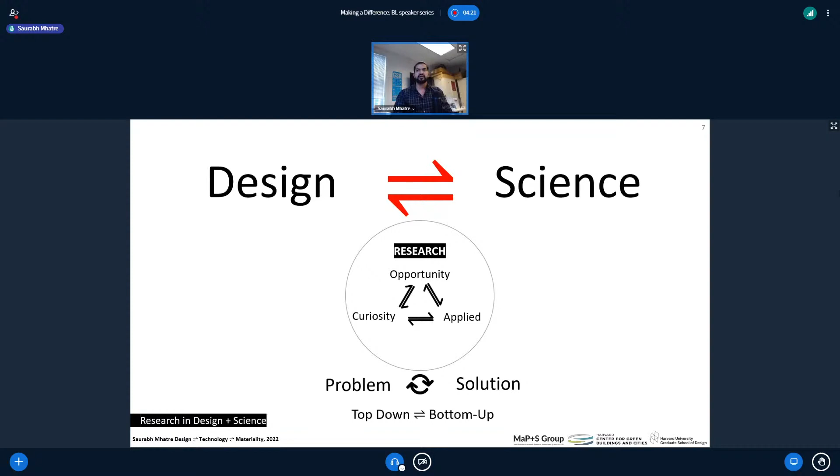You'll also see an interesting dialogue and dynamic shift between curiosity-based research and applied research, where we give ourselves the freedom to explore as well as, at some point, focus on solutions to a very well-defined problem.

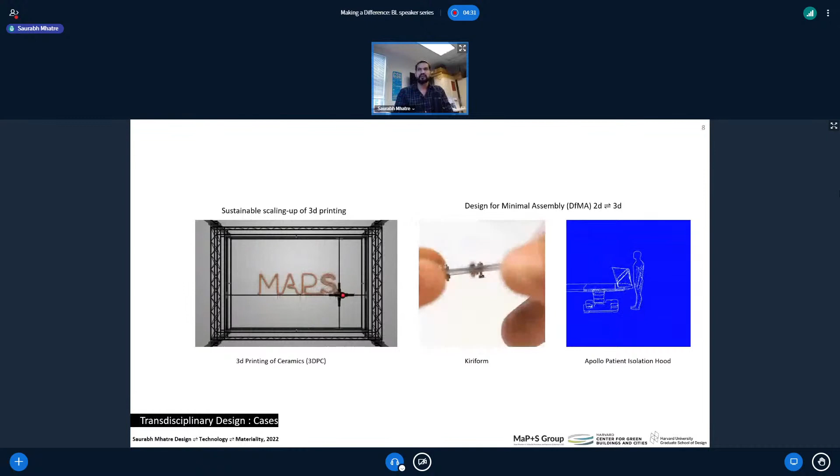I'm going to give you 3 examples of projects which fall within the blurred domains of design, science, technology, materiality, and in some way contribute to the larger agenda of sustainability.

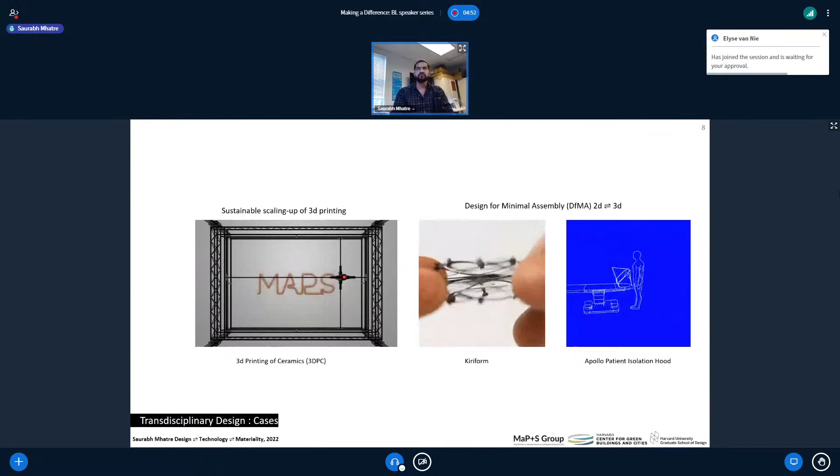First, I'm going to talk about our work on 3D printing of ceramic, a sustainable and opportunity-driven way of scaling up 3D printing in context to architecture. Then I'm going to show you 2 projects: one which starts off as pure curiosity-based research, a project which is a solution trying to find an application; and another one under applied research, which is a solution for a well-defined problem.

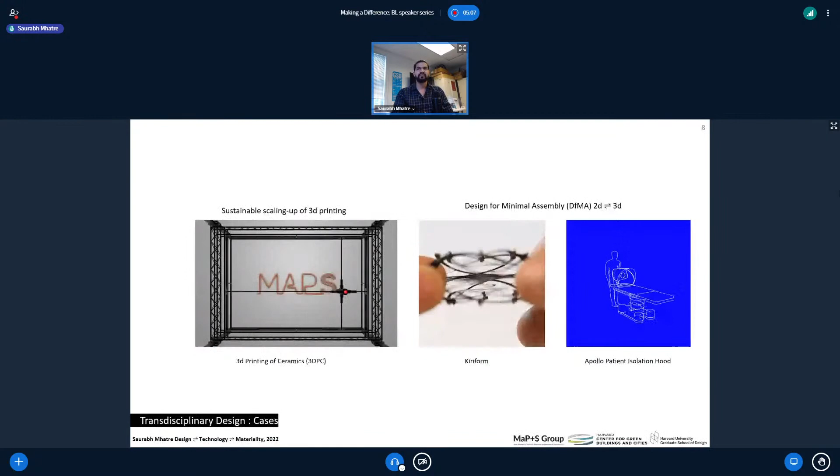Due to time constraints, I won't go too much in depth in these projects, but I'm open for questions after the presentation.

So, why ceramic 3D printing? 3D printing, also known as additive manufacturing, is a manufacturing process where the 3D printer creates three-dimensional objects by depositing material layer by layer in accordance to an object's model. Using these 3D printers, we can make very efficient, precise, dynamic, and beautiful creations with a variety of materials.

Majority of the 3D printers available in the market cater to the desktop scale, something that you can easily keep on your table, and use commonly available plastics as the printing material.

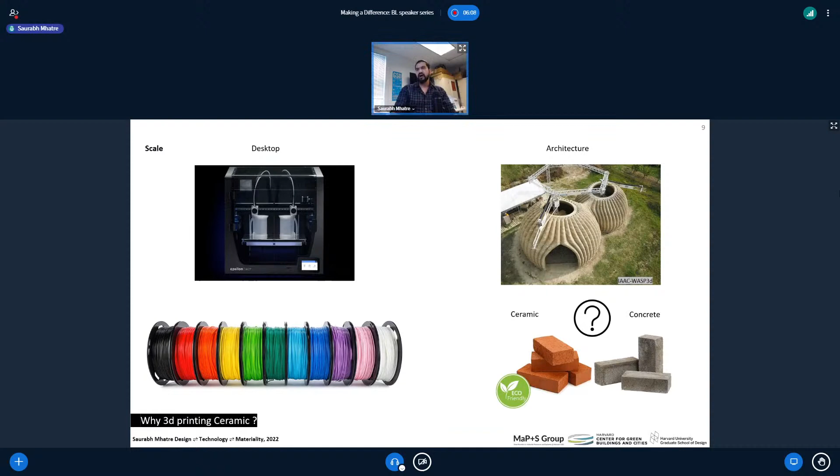When we think about 3D printing of larger objects like buildings, we can't imagine printing tons and tons of plastic. It's just not sustainable. Hence, materials like ceramic and concrete come to mind. Majority of large architecture scale 3D printers are 3D printing concrete, but we believe ceramic holds a lot of promise as a sustainable option, and when paired with robotic workflows, can drastically reduce the carbon footprint imposed by the construction industry.

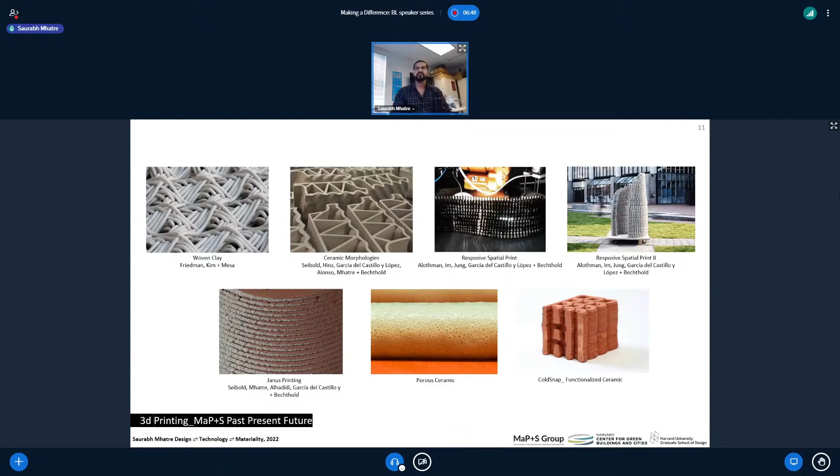I would categorize this as opportunity-based research. For the last few years, we, the MAPS group, have focused on studying conventional ceramic manufacturing and forming processes and researching how integration of emerging technologies can add novelty to the industry and help achieve larger goals like customization and sustainability. I'm going to focus on two projects: one which looks at 3D printing a single body of clay, and another where we co-extrude two different bodies of clay together.

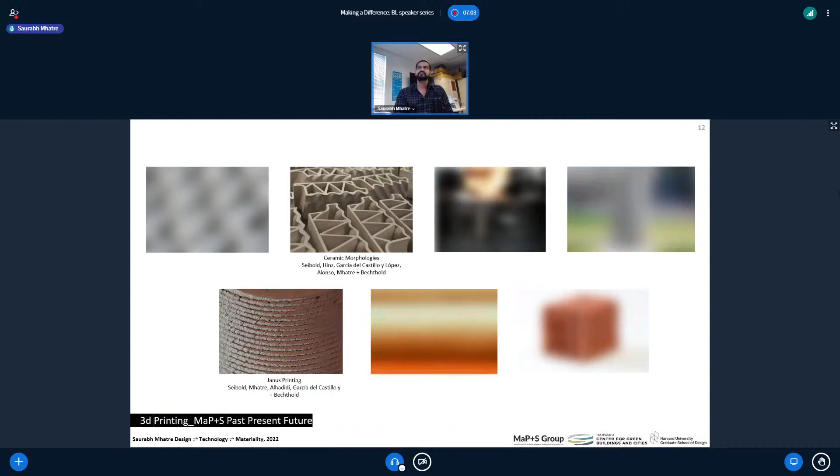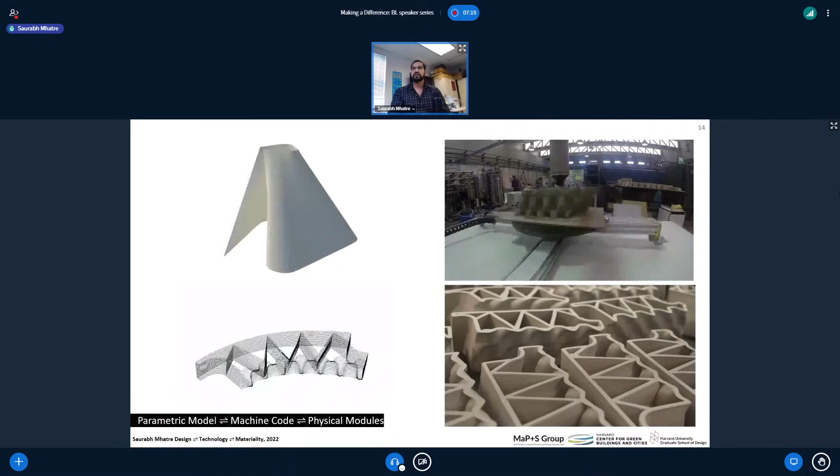The project Ceramic Morphologies utilizes a clay extrusion system and a three-axis armature to produce 552 unique ceramic elements for the pavilion to be exhibited in Spain.

Each element is sized according to its position within the structure, the dimensional constraints of the printing bed, and a maximum allowable toolpath length. We developed a novel computational approach to generate a surface geometry of the pavilion, discretize the form into individual bricks, and accommodate for the frame.

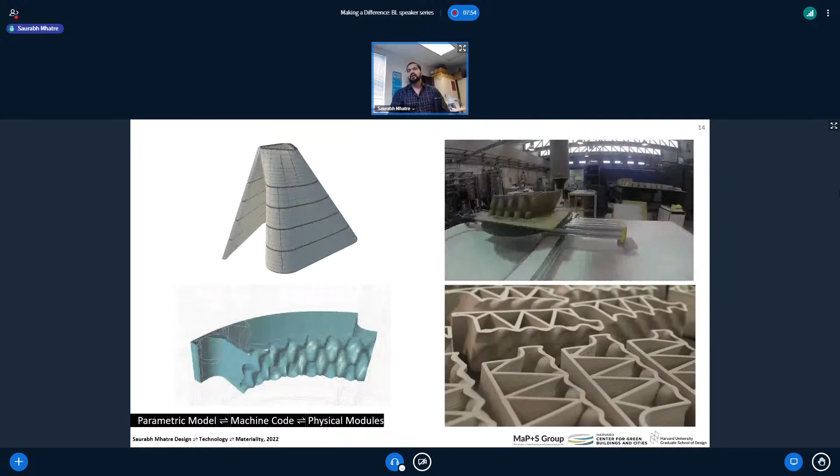Toolpath geometry and machine code is also generated directly within this parametric model. The digital workflow enabled us to account for shrinkage of the clay during drying and firing, reduce overall printing time and material consumption, and tune the stability of individual bricks.

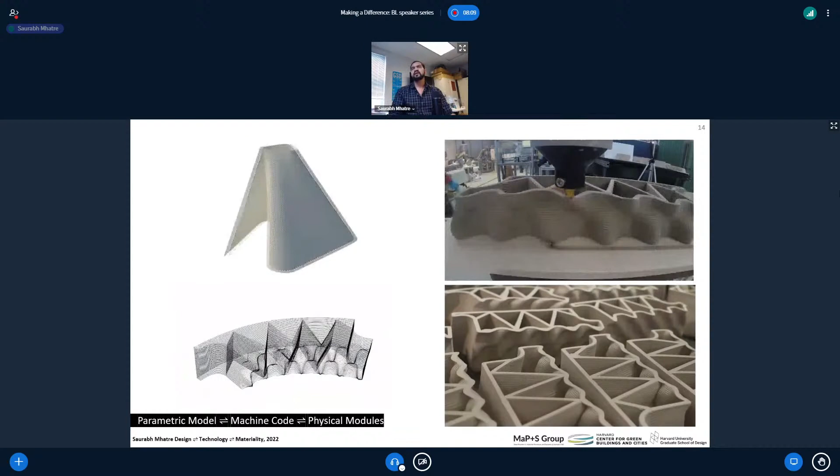Here are some shots of the pavilion. The outside surface was smooth and the inside surface was bumpy, based on research on thermodynamic heat transfers of different surface geometries. This project shows that using CNC or robotic technologies with ceramic enables the vision of mass customization rather than mass production.

In this project, all the material testing, workflow development, and prototyping was done in-house at the university in collaboration with the Harvard Ceramic Lab, and the knowledge was shared with the Institute of Ceramic Technology, Spain, who did the final production.

After developing a workflow for efficient printing of one single clay body, we wanted to see what opportunities arise when we are able to print multiple bodies in one single print. Is it possible to print two different clay bodies with different mechanical performative properties in a single module?

Can we imagine our walls having a single material, ceramic, but performing differently across the section? Some areas taking the load, some offering thermal insulation, some being super porous and lightweight, all within one single homogeneous form. That's what we explored in Project Janus.

Janus is the god of transition and duality in ancient Rome, and hence seemed like an apt name for the project.

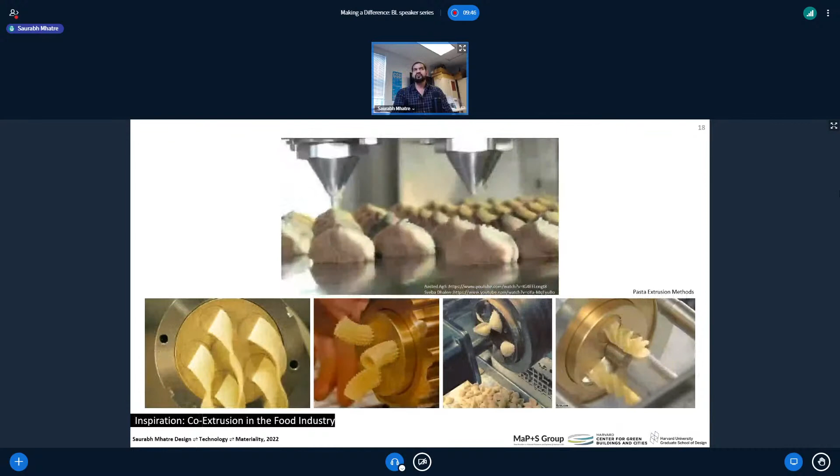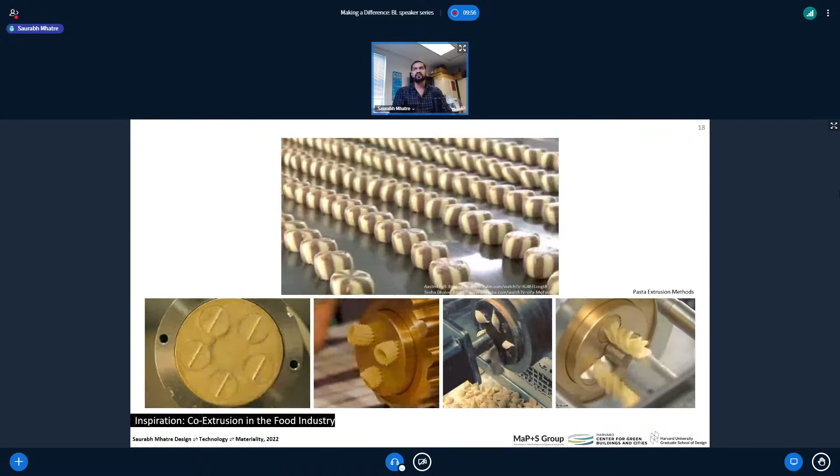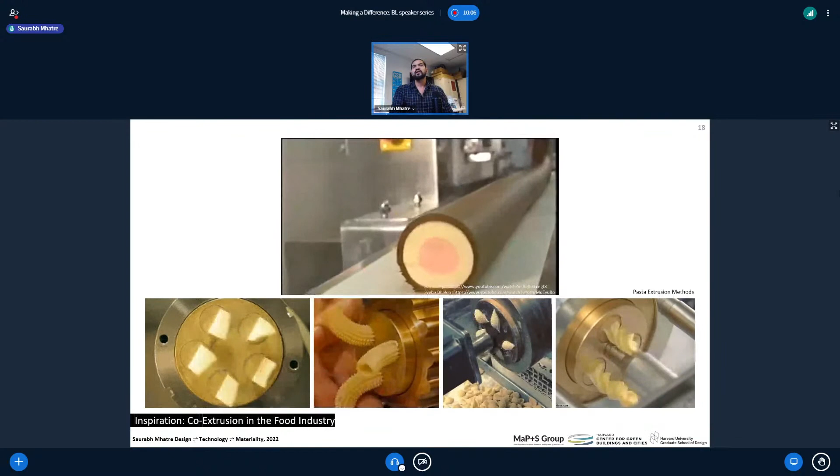Throughout the process, we always look at examples from different fields as a starting point. In this case, the method of extrusion has been very well studied and mastered in the food industry for the manufacture of many commonly known food items, ranging from sweets to different shapes of pasta, along with all the nozzle designs and research.

The same is also well developed in the polymer extrusion industry and academia, especially in the design of hierarchical coaxial nozzles—in simple terms, how you can have multiple nozzles, one inside the other, extruding different kinds of materials.

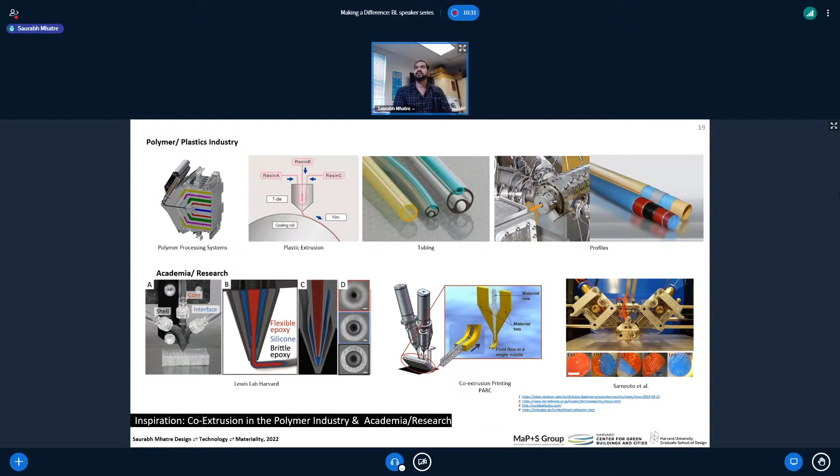We thought, wouldn't it be cool to do the same with ceramic? What design and application opportunities would it open up if we could achieve a multi-material 3D printed ceramic workflow? Building on previous work, our setup consisted of two tubes of different bodies of clay ceramic, red and white, with similar shrinkage and water absorption properties, filled in a tube of a screw extruder—basically a big syringe—mounted on a 6-axis ABB robotic arm, which is conventionally used in complex fabrication processes like assembling cars.

The two material tubes were aligned at an angle of 45 degrees, as it reduced the length of travel from individual clay cylinders to the final nozzle, as well as increased the travel length after the point of intersection to counter material stress. So the 45 degrees had a huge impact on making it easier for us to extrude both materials together.

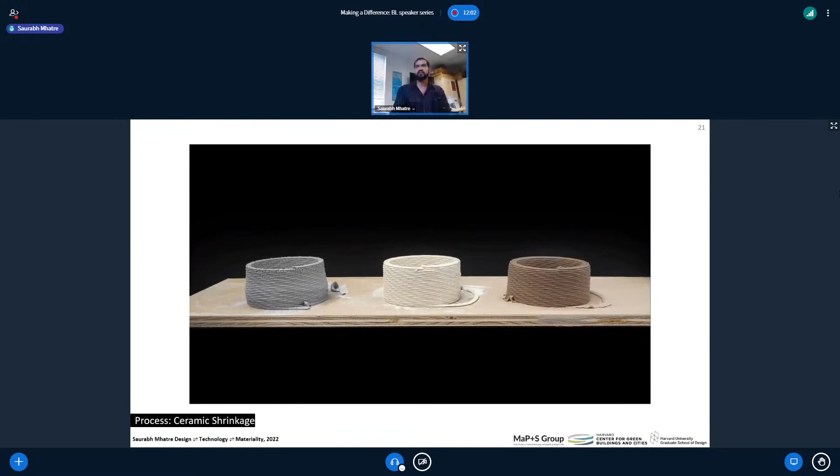Ceramic as a material goes through shrinkage in multiple phases, from its first stage of printing to its final stage of firing. That's why it was very important for us to select two bodies with similar shrinkage rate and water absorption, so as to prevent a lot of cracking after co-extrusion due to similar properties.

The design of the nozzle played a very vital role in the process. After a few iterations, we narrowed down to two designs: the Janus nozzle, in which we could print two materials side by side, and the center core nozzle, which would allow us to print one material inside the other. Both had a lot of potential in the design affordances they could offer, but for this project we decided to focus on the Janus nozzle, as there was more design space to explore given the degrees of freedom of the robot it would be mounted on.

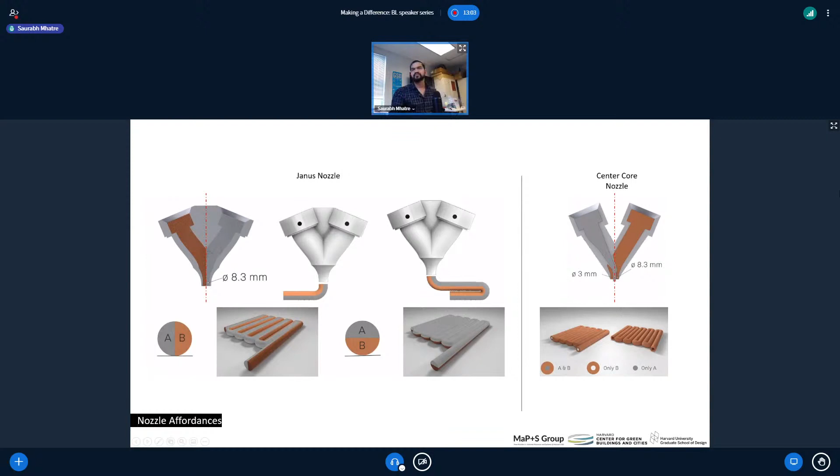This is how the extrudate, the material that comes out of the nozzle, would look like for both cases of this nozzle.

Using the Janus nozzle, multiple tests were performed to explore the design space and establish relationships between various extrusion parameters, like robot speed, the height at which each layer is printed, the bead width, which shows the width of the printed ceramic co-layer, the extrusion rate, etc. We tested different dimensions from lines to surfaces to solids.

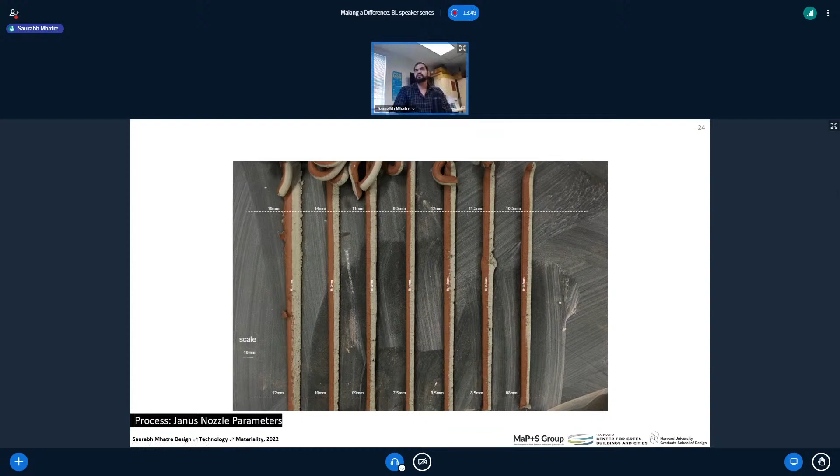Once we got a hang of these parameters, we started testing them out on flat toolpath objects. A toolpath is a line that the extruder tip will follow. Using these objects, we also started testing the different relationships between the parameters.

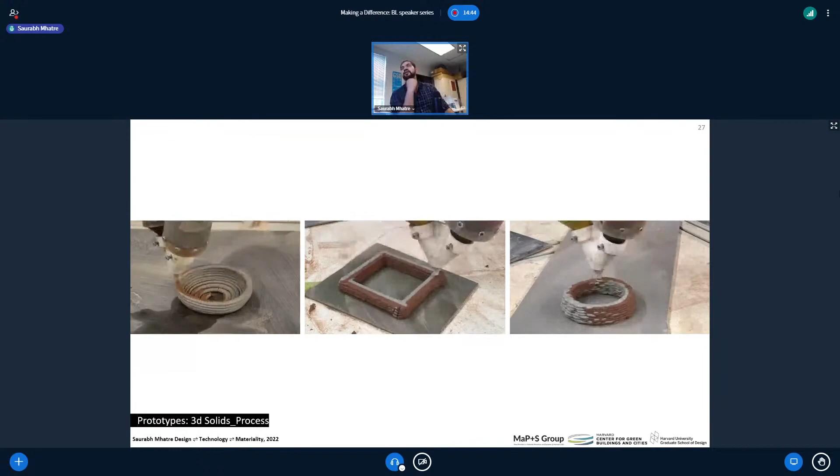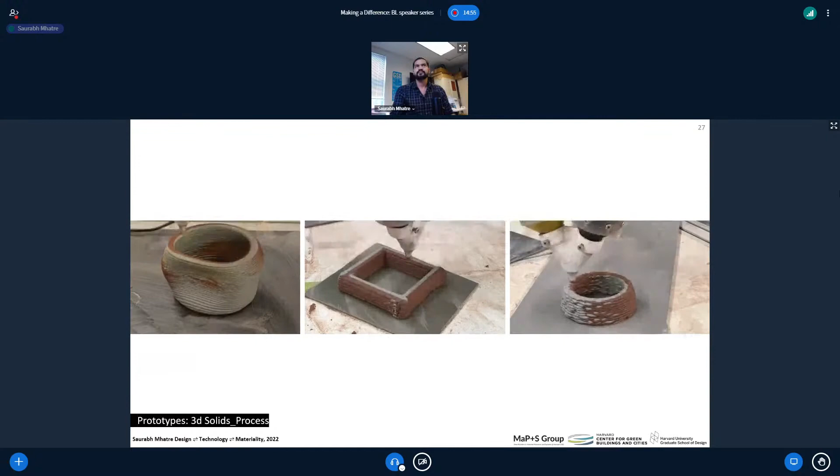We also experimented with three-dimensional objects where the toolpath was static and the nozzle orientation was dynamic, as well as some forms in 3D. These are after the fired stage.

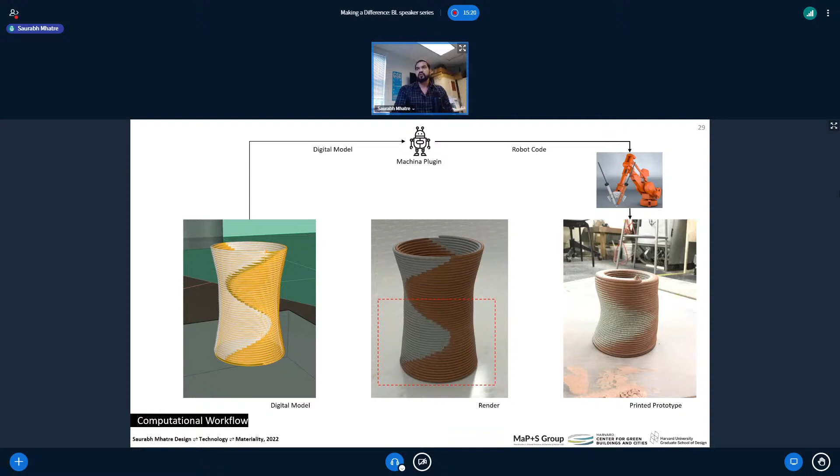Our computational workflow, from digital geometry to the robot code, which is basically instructions sent to the robot via a plugin called Machina developed by one of our team members, to the printed geometry, worked quite efficiently.

Based on the rotation of the fourth axis, we were able to accurately determine the deposition of a particular material where we wanted it. This helped us know exactly the effect the angle of the extruder, the fourth axis of the robot, would have on the printed path, as well as how the path would be seen from the top view and the side view.

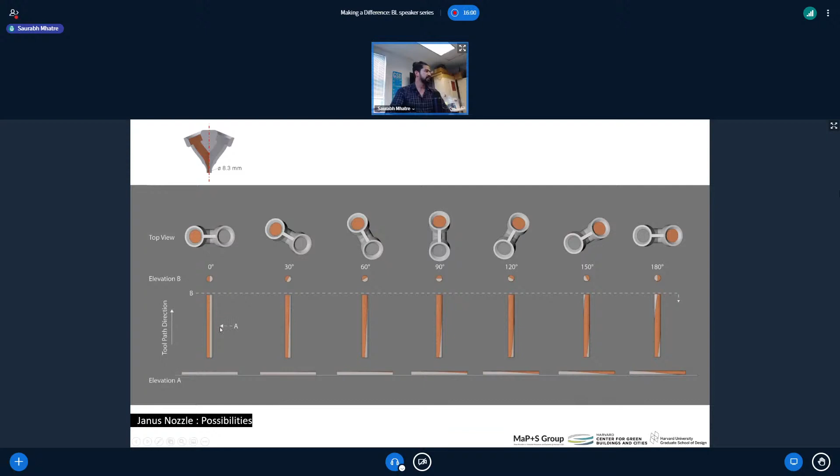Knowing this, we decided to create a proof of concept of our research to take as input a black and white image. Our script would divide the image into horizontal toolpaths and rotate the nozzle of the extruder 180 degrees at the fringe of the black and white image layer.

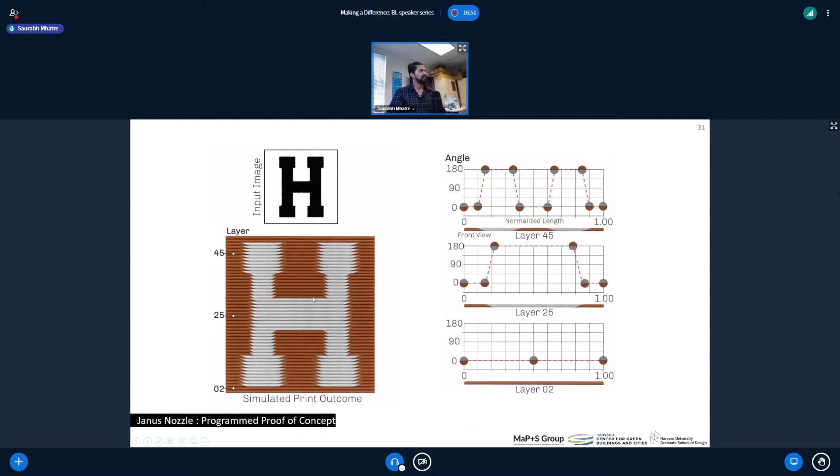For example, at layer number 45, the extruder is going through the toolpath in a particular direction, but as soon as it detects a change from the white side of the image to the black side, the extruder's fourth axis performs a 180-degree turn, which you can also see here. Hence, we can very accurately print one particular material in certain areas of the image compared to the other.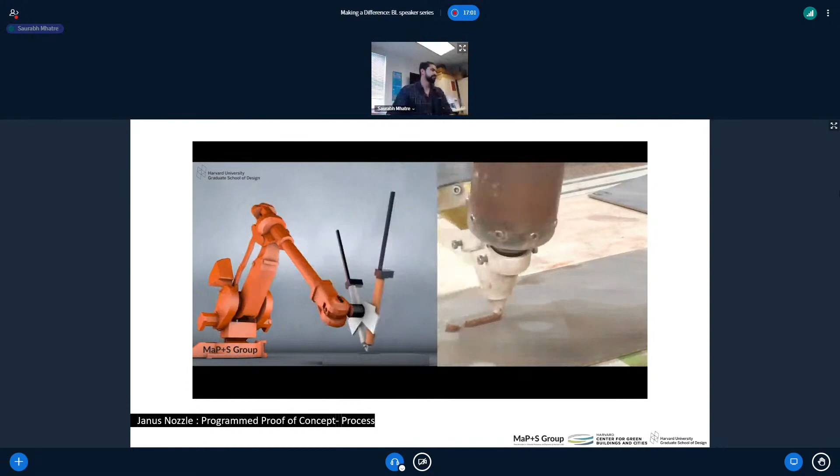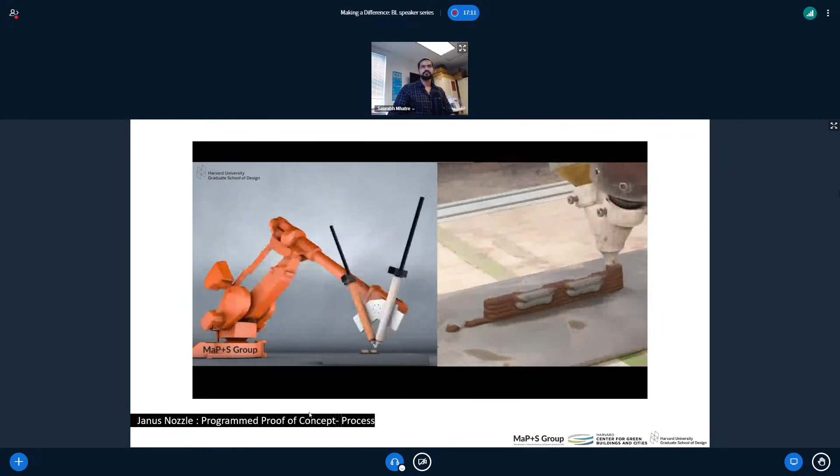Here is a video of the process. I'm going to just skim a little bit through it.

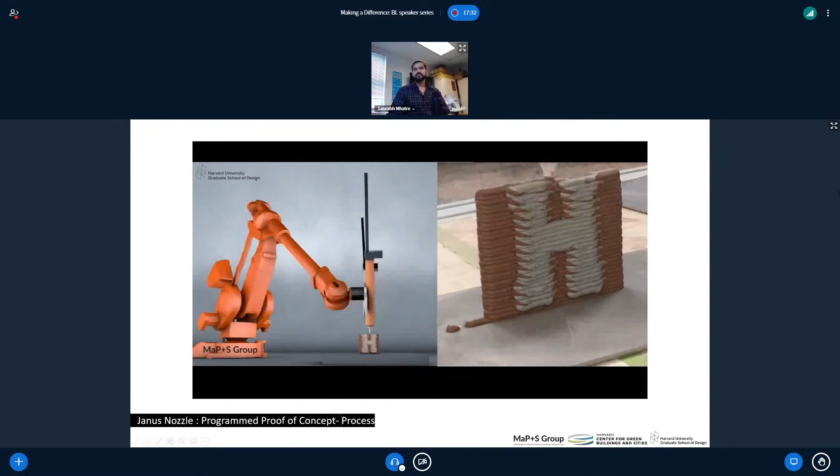And here are the fired versions of the printed tiles. For us, the two different colored bodies of ceramic were just placeholders to develop a workflow to print two materials together.

In some of our current work, we have one body of clay with high mechanical strength to take loads, and another body which is a very porous and lightweight ceramic foam to act as insulation, all printed within one single brick. Instead of using many different materials, as is typical in a wall section of a house where different materials perform different functions, can we envision that the same performance can be achieved by a single material of ceramic, but with different properties embedded within it?

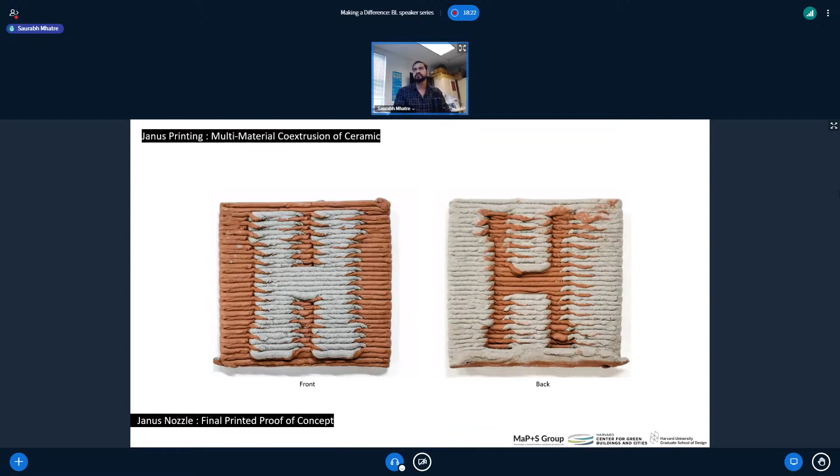The next project I'm going to talk about is Kiriform. This project falls in the curiosity-based, opportunity-based research domain and is a solution looking for an application.

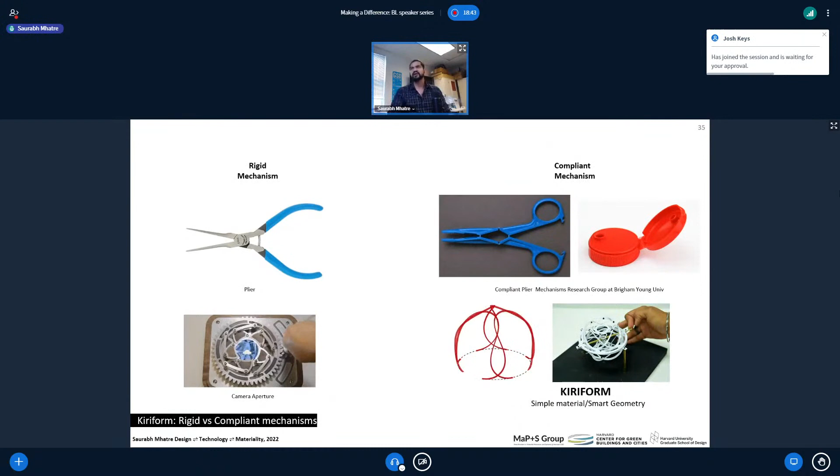I'm going to start off by highlighting the differences between rigid and compliant mechanisms. Rigid mechanisms require a lot of parts, are complex to assemble, and prone to wear and failure. Compliant mechanisms, on the other hand, are lightweight, low cost, easy to assemble, and require minimal actuation.

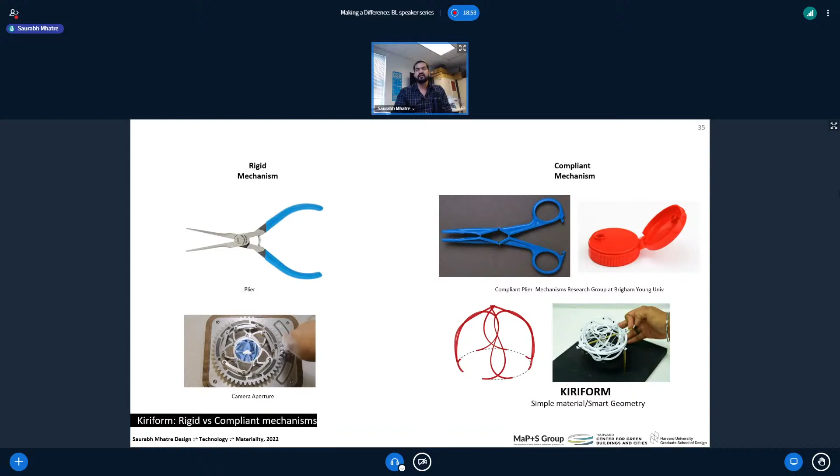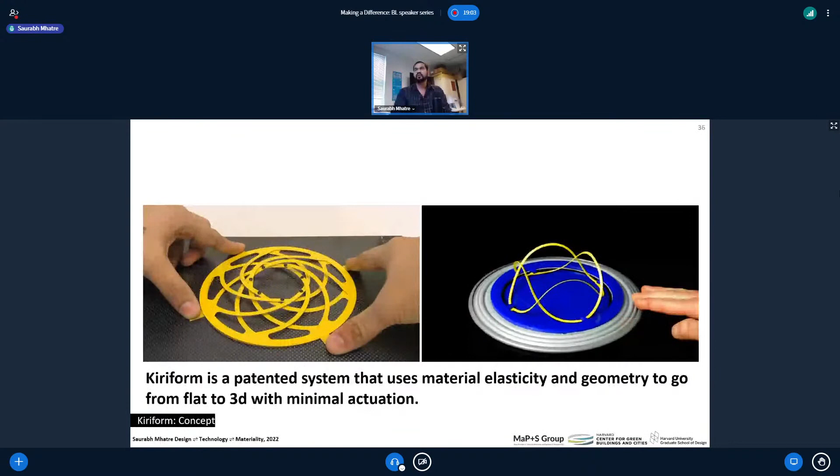Kiriform is a patented system that uses material elasticity and geometry to go from flat to 3D with minimal actuation. This mechanism leverages buckling, which is conventionally something that you always try to avoid in structures and construction, and it uses it for its deployment.

This is different from bending based on the direction of force that is applied. If you look at bending, the direction of the force would always go up or down, but for buckling, your force is always going to go perpendicular to the cross section, and this is what happens when sheets buckle as compared to bending.

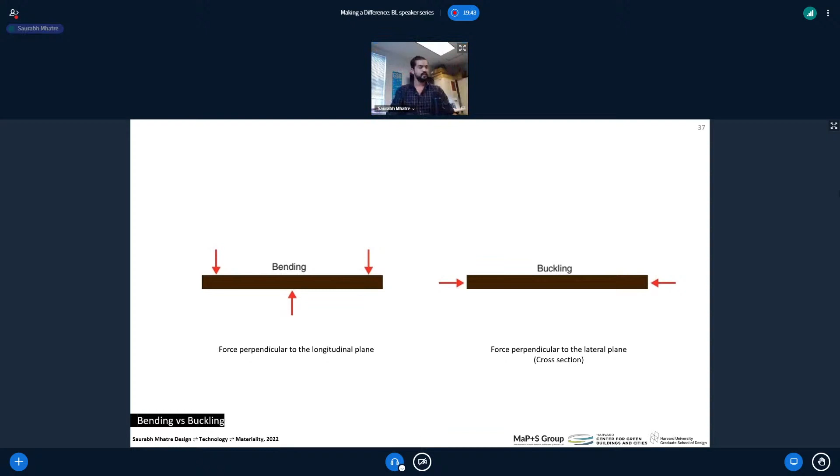Kiriform is manufactured out of flat sheets of elastic material with simple fabrication techniques. It is fast to assemble and requires minimal hardware, making it cheap to manufacture.

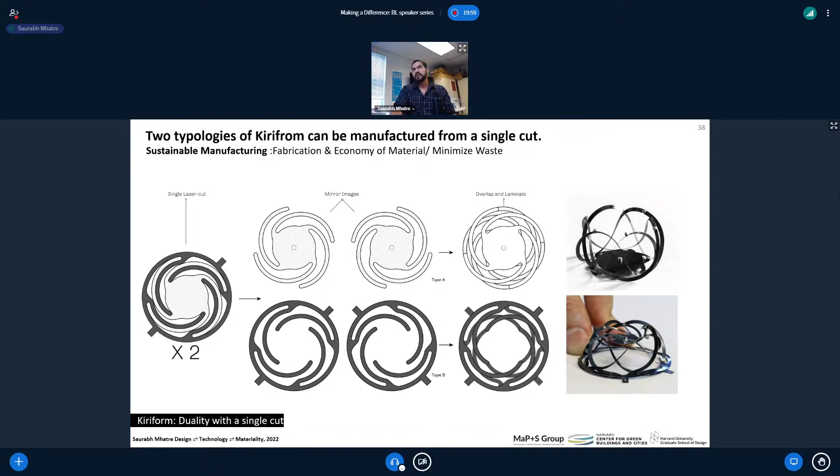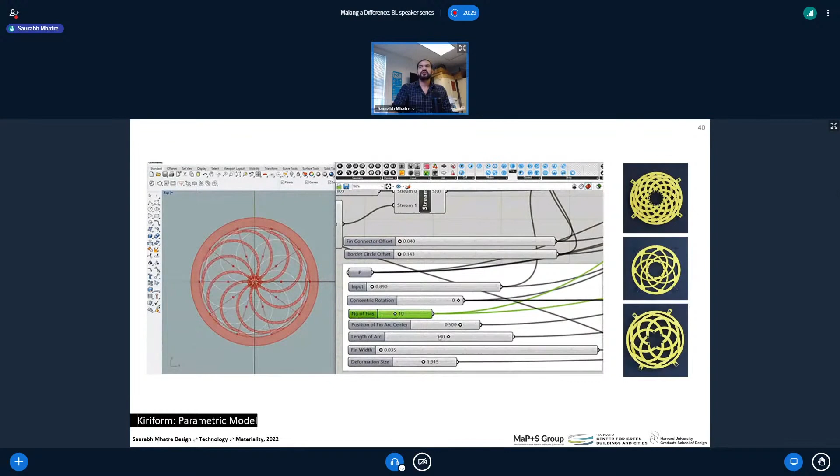With the help of our parametric model, we have control to change all the essential parameters of the geometry, from the diameter of the mechanism to the number of fins and widths of fins, etc.

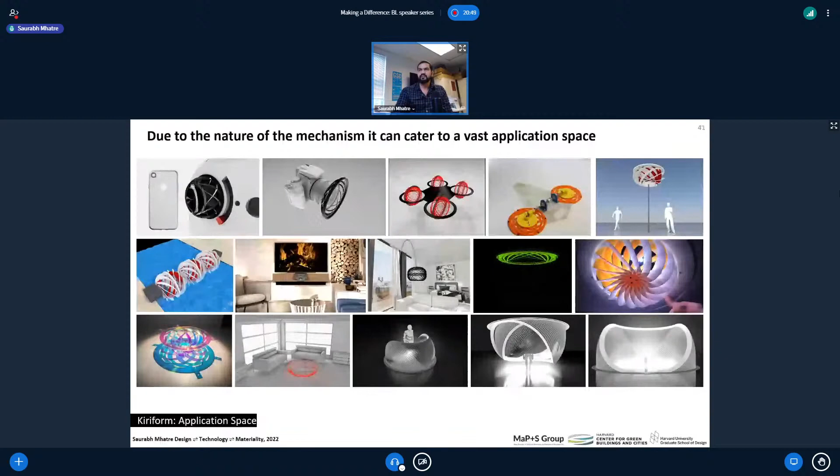Our developed parametric model makes the system applicable to a wide range of scales, from small medical devices to larger furniture and structures. The system is suitable anywhere fast and compact deployment is needed, as in the following examples.

We have successfully developed Kiriform at the millimeter scale in collaboration with the Harvard Microrobotics Lab. Kiriform can be integrated in optical devices with moving parts such as lenses and diaphragms.

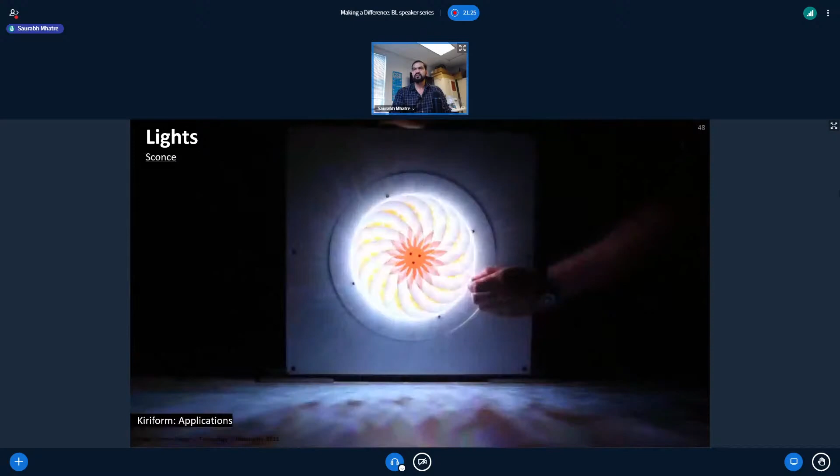Its aesthetic qualities are also suitable for the design of household products such as lampshades and lighting fixtures, where the intricacy of the geometry creates interesting patterns both as a static object or even better as a dynamic one. The compliant transformation of the system can be used to modulate the intensity of light, creating an analog dimmer.

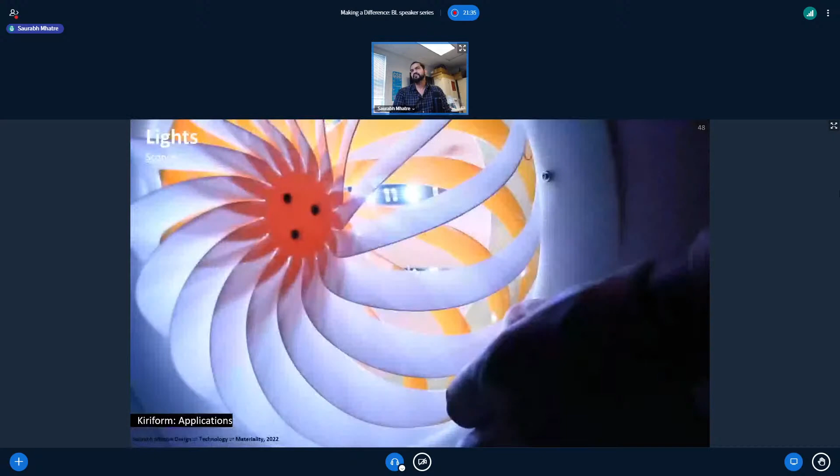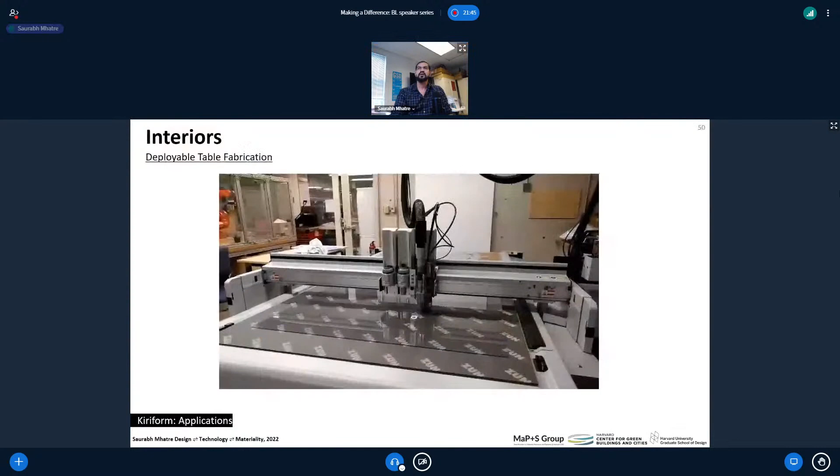Kiriform is suitable for furniture designs that can be shipped flat and deployed very fast by anyone with little effort and no tools. The method of fabrication is dependent on the scale, which in turn determines the thickness of the materials used.

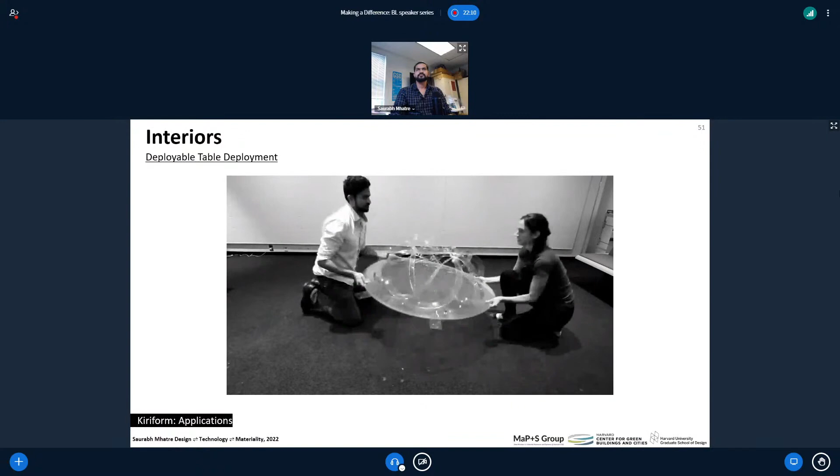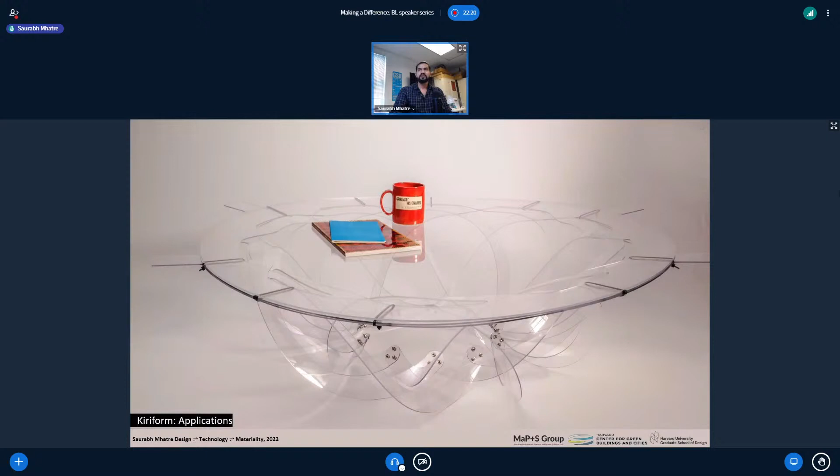It is compact to store and transport and easy to deploy. Its geometry facilitates the creation of functional and affordable products while at the same time providing minimal and elegant design aesthetics.

As you can see from the above examples, different scales of this mechanism can be manufactured from different materials and different processes. Some fabrication processes make sense at certain scales.

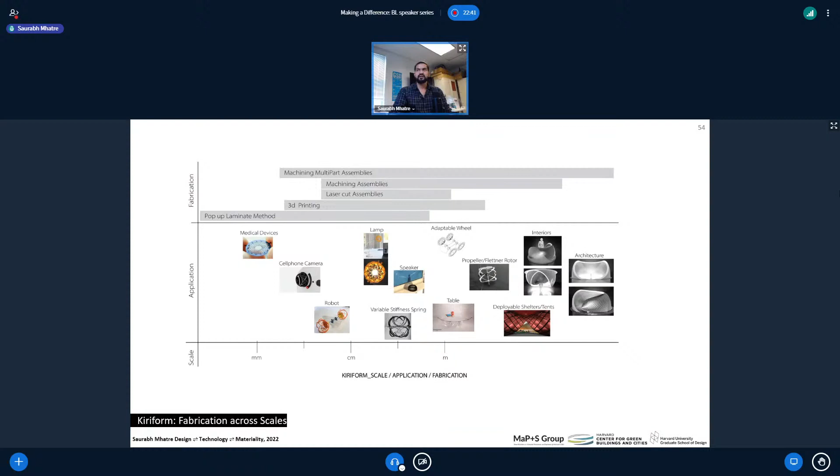As a side note, we also have a very good agreement between our experiments and simulation, which I decided to keep on the backstage of this presentation. Those interested can check out the paper we published on the same in the Advanced Functional Materials Journal.

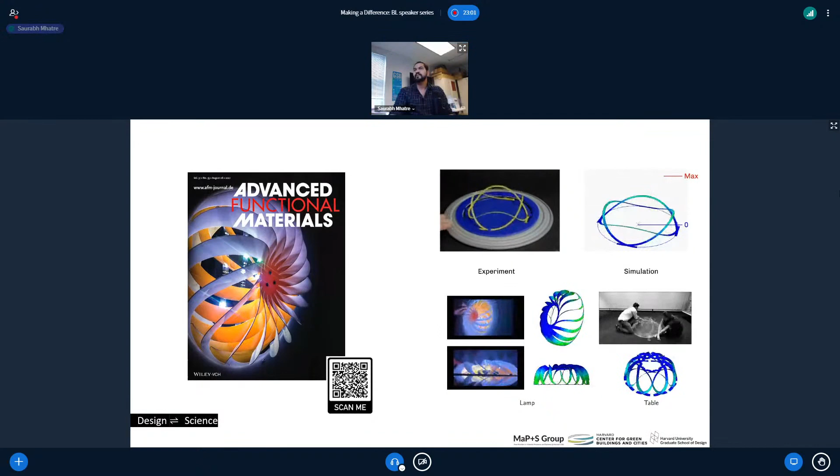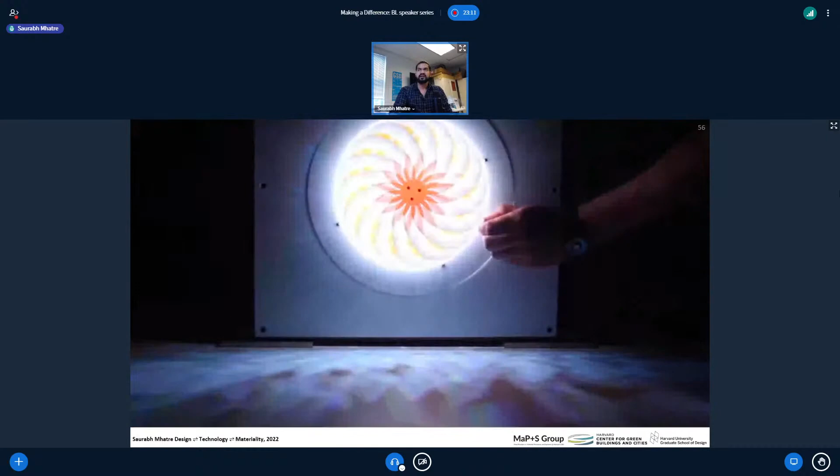In conclusion, Kiriform is a technology with high parametric flexibility to cater to applications at various scales where rapid deployment is essential.

Again, to reiterate, this work would not have been possible if it wasn't for various people at Harvard from different labs who I collaborated with at different scales, from micro robotics to the fabrication lab who were able to help me create large scale prototypes.

Okay, so onwards to the next project.

The pandemic has been the most dramatic disruption to human activity in a generation. For many designers, it has been a time to refocus and rethink and reflect on how we design products, and how, as designers, we can use our skills for the greater good.

For our project, the Apollo Isolation Hood, our problem was very well defined: creating a barrier to separate the doctor and the suspected COVID positive patient, and hence reduce the aerosol spread of COVID.

The Apollo Patient Isolation Hood is a localized negative pressure ventilation system for hospital beds to help contain the droplet spread of COVID, including during aerosol generating medical procedures such as intubation and extubation.

The hood encloses a patient's upper torso and head in a negative pressure environment. It provides barrier protection between the doctor and patient, and aerosol control via the negative pressure environment.

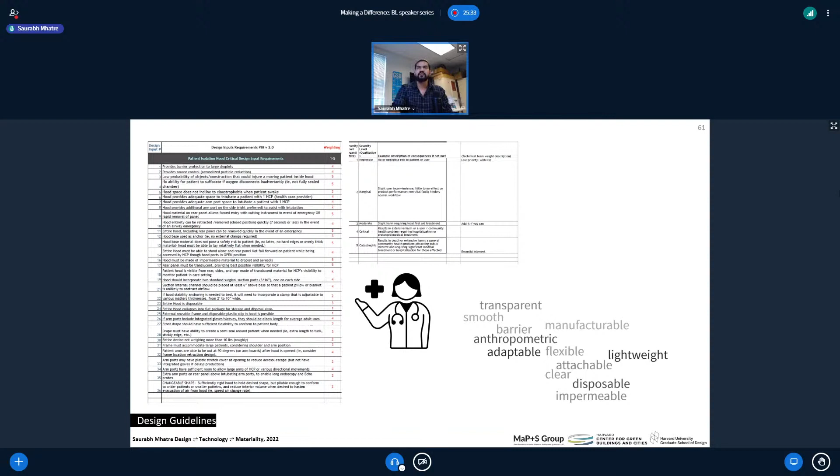In our meetings, the doctors from Mass General Hospital and Boston Children's Hospital provided us with 36 guidelines to design a hood and their weighting of different aspects of the hood as per priority. Some of the important aspects to summarize that they wanted were: transparent, easy to manufacture, able to adapt to different sizes of people on different beds, lightweight, impermeable, as well as optically clear.

As a group, we looked into multiple options of enclosures which would be deployable and easy to make.

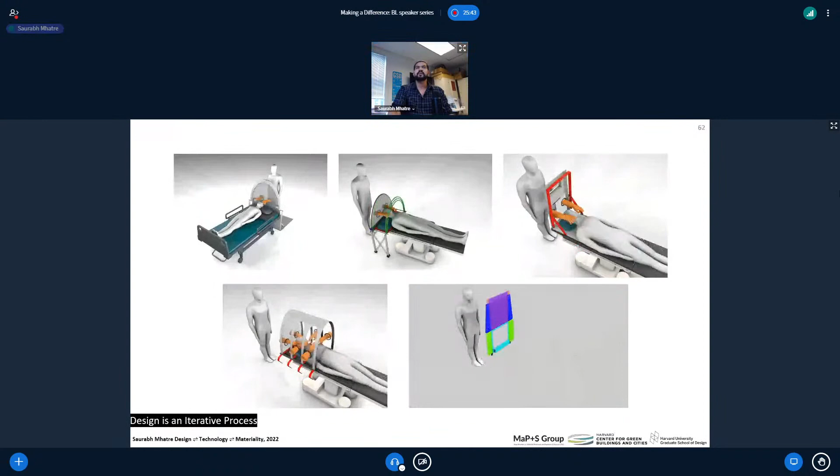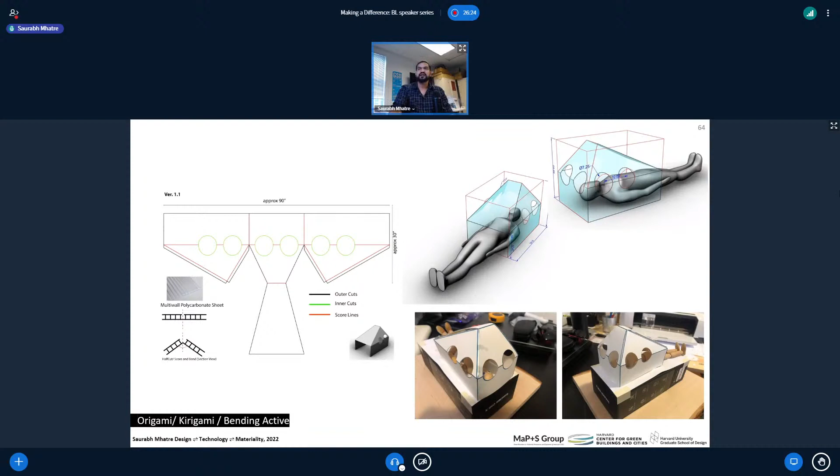Because of the severity of the pandemic, we were on a very strict timeline and wanted to look at forms which were easy to fabricate and very easy to assemble with minimum effort. That's why we started to look at techniques of origami, kirigami, and bending, some techniques of creating volumes from flat sheets. As we were in lockdown and had lost access to the fabrication lab, we started simple by using paper and simple knife cutting tools to make small prototypes of a design, while also speculating the material and process needed when we needed to scale up to a larger version.

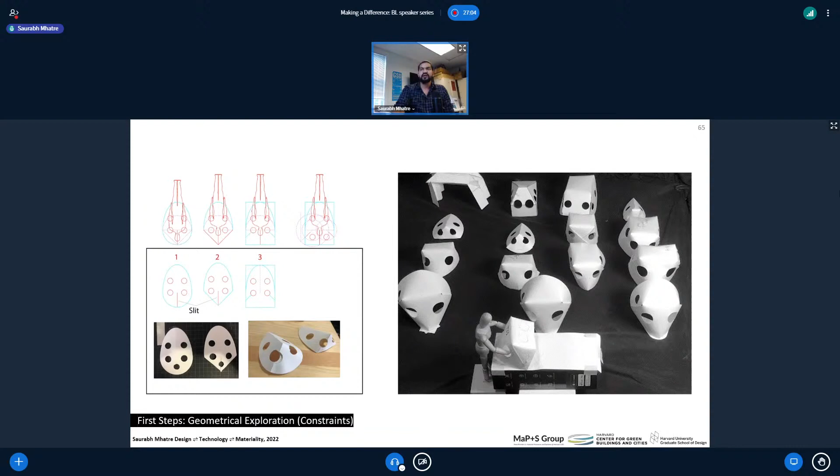Simple origami techniques were a good start and could easily be scaled up using thin sheets of PETG plastic. One drawback with origami was it was always accompanied by edges and creases. Hence, to omit the edges and get optical clarity, we started bending instead of folding. So everywhere there was a well-defined edge became a smooth bent surface. The plastic needed to be thin enough to fold and bend, but stiff enough to keep shape and not wobble. The bending and locking also added a lot of structural stability to the forms.

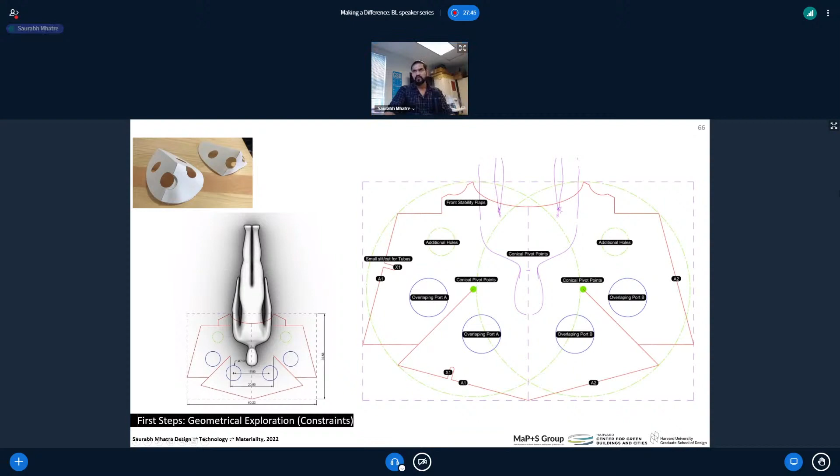Here is one version of the hood we designed. I'll use this to explain how it would fold. As you can see, the overlapping blue ports are the ports where the doctors would actually be inserting their hands to operate on the patient. The way it folds is shown in the small paper model on the left, how you have one small conical point or pivot. So these two conical pivots are going to be the guiding circles for side A1 to match again on side A1. There's more that will be better shown on a video.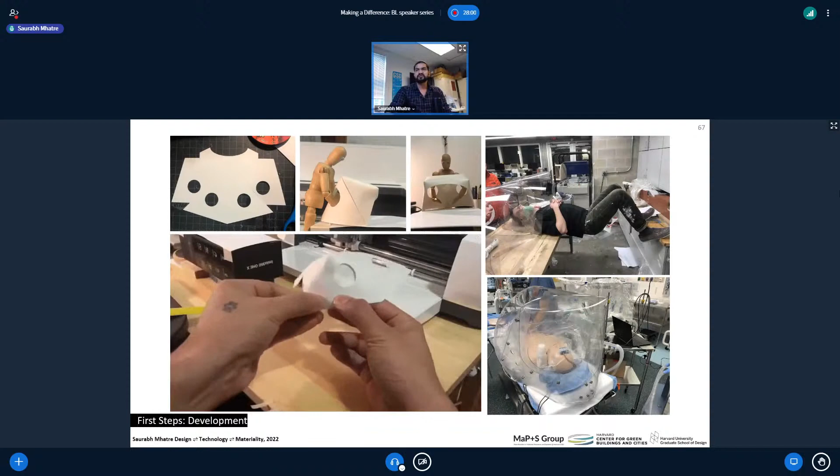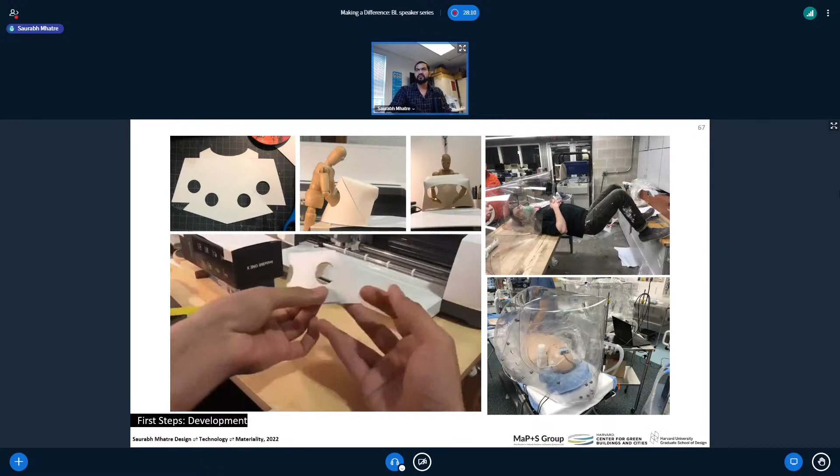So as you can see here, assembly of a miniature scaled version of the hood. Hence, seeing potential in this design, we decided to make a full-scale version of the same with PETG plastic of thickness 1.5 millimeter using the Zund cutter. The best aspect of these forms was that they could be manufactured from a single flat sheet and needed minimal joinery. The doctors from MGH tested this in a lab as well as at the hospital.

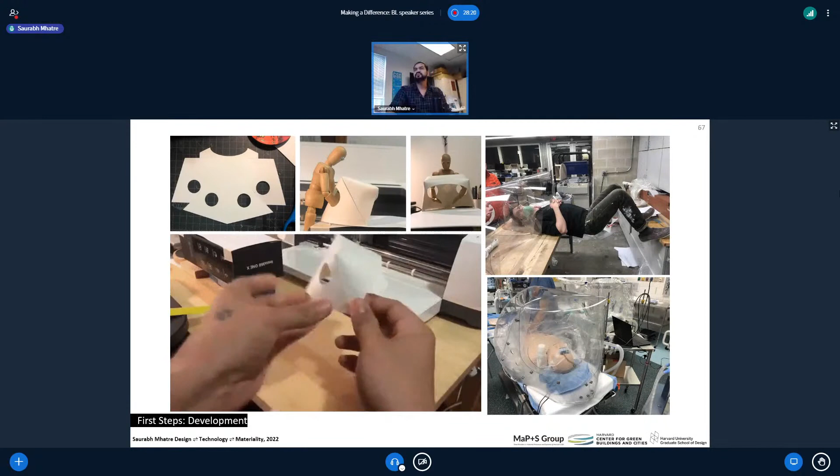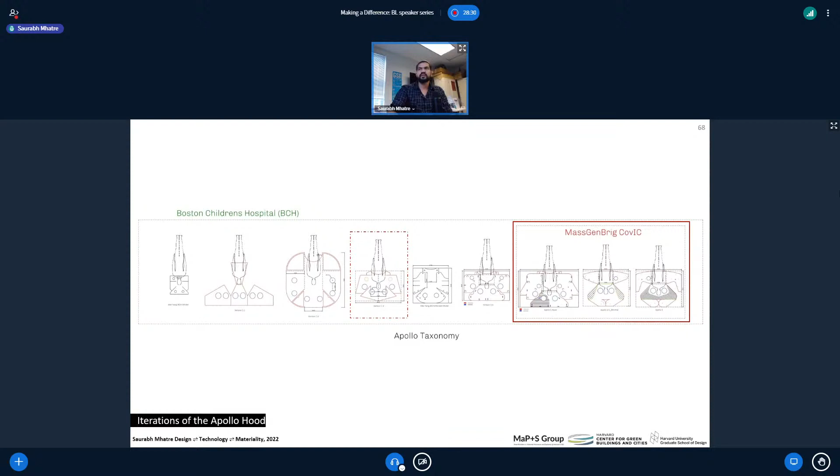Over the next few days, we prototyped through a lot of different iterations, taking into account the guidelines, stabilities, tests, doctors' feedback, etc. Some of these stood out as viable options, which satisfied most of the critical guidelines highlighted at the start. They did have some demerits though. Looking at the pros of all the most promising options, we designed the final hood which had the best parts of the above options and none of the demerits.

So this was the final option, which we called the Apollo 3. And as you can see, it has the two arm ports for the doctors. It has these side films, which would go and fold here. It has a base plate, which attaches the hood to the base of the operating bed. And it also has an extra arm port here for emergency procedures.

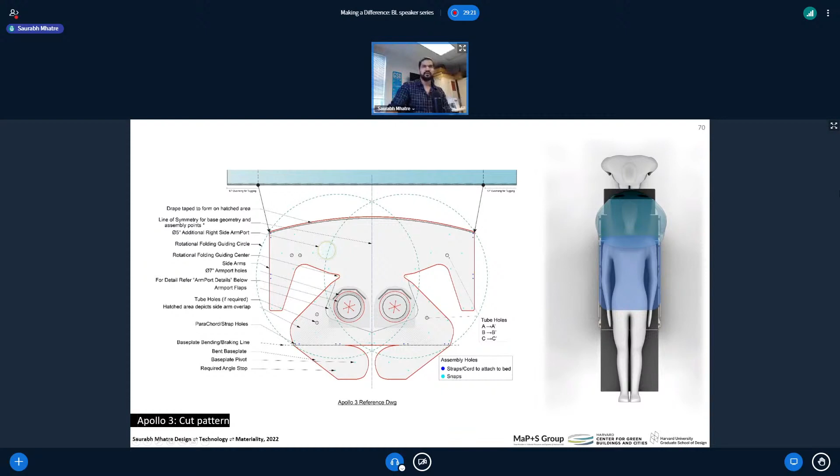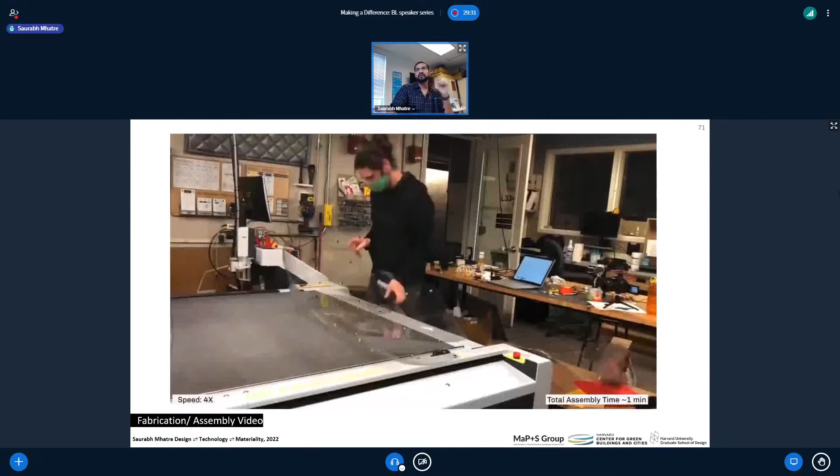So we can see in this video the way it's fabricated. It can be cut in less than 20 minutes and it can be assembled under 1 minute with minimal joinery. And because it's compliant, it can also adapt to different sizes of people as well as beds.

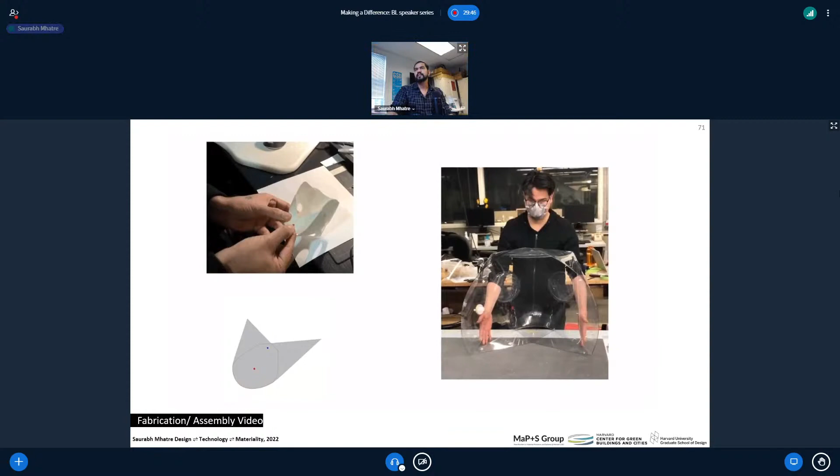We were able to use a thinner material in the Apollo 3, and by some smart overlapping of geometry, give a double thickness layered wall where the most strength was needed, which was at the back here, which you can see on this side.

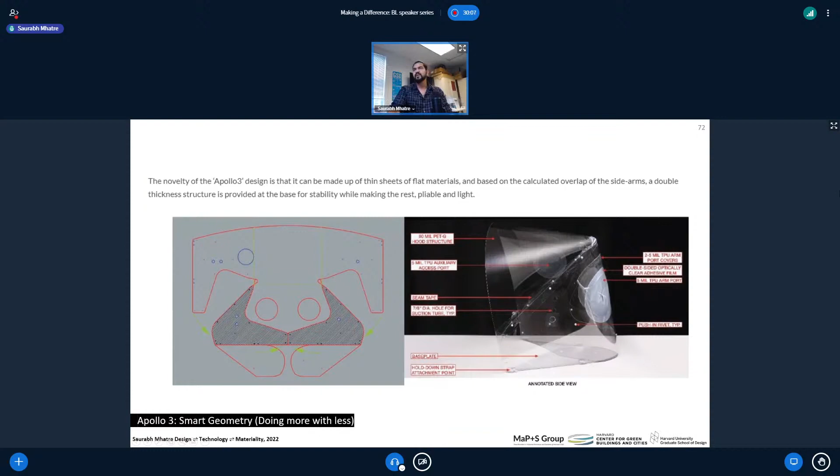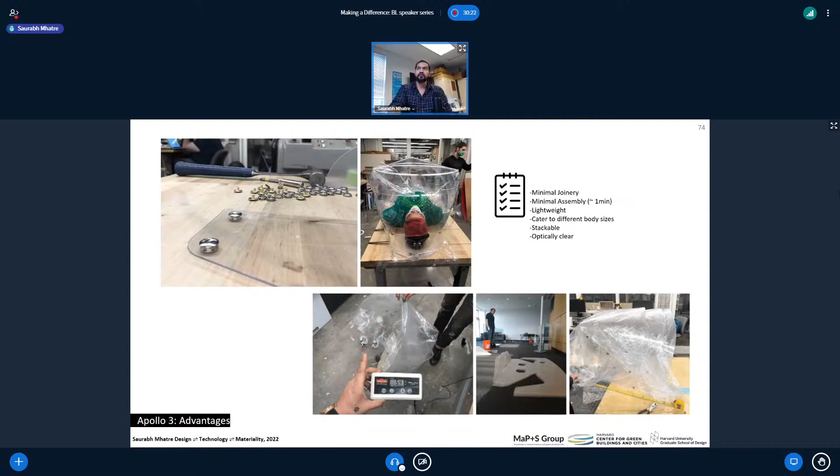Here are some detailed shots of the hood. The Apollo 3 was made up of a flat sheet, was easy to manufacture, had minimal joinery, and assembly was lightweight, was compliant to cater to various body types, optically clear, and stackable.

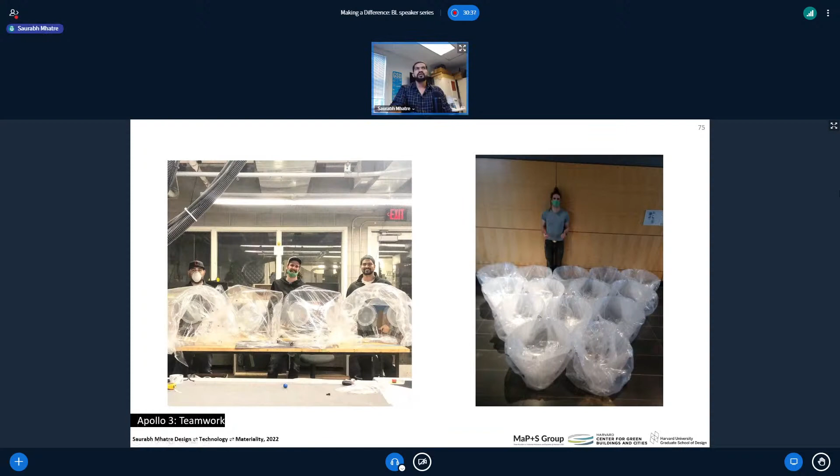We made 3 final prototypes in-house for a start and 20 more later after approval, and sent them to Mass General Hospital, and 50 more later, after which it was manufactured by a company which my friend started.

There's audio. Hello? Can you hear me? Yep, now.

Communication and teamwork is a very important part of the process. Due to material scarcity and supply chain issues, we had to be very mindful of the plastic we used. PETG was in short supply, and most of it was being used to make face shields.

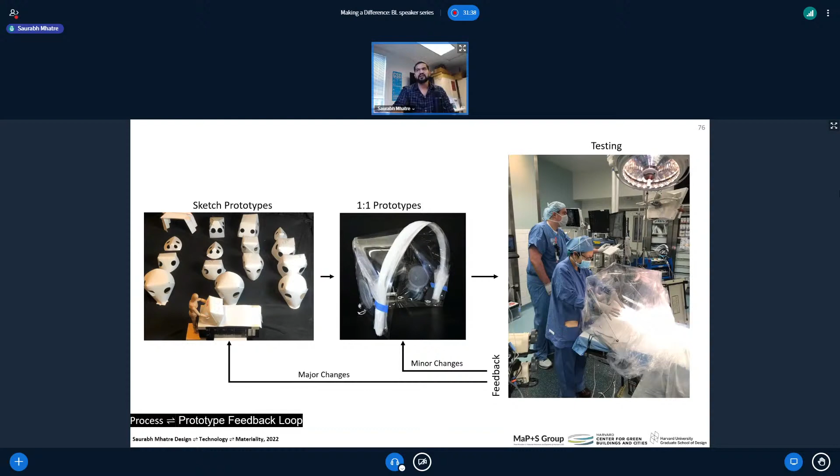Any minor changes that we made were directly on the full-scale models, and major changes were first tested on the small scale before translation into full scale.

This project was a collaborative, non-hierarchical effort of more than 200 people, made possible using online communication via Slack and Zoom between designers, engineers, doctors, and industry partners.

All files of the project have been made open source via GitHub to help disseminate this knowledge to anyone who wants to make a hood.

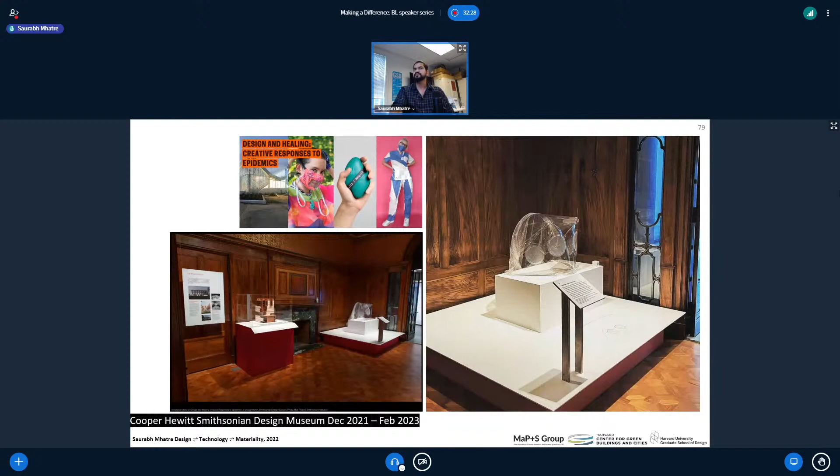It started under strict fabrication constraints during the COVID lockdown, was translated into full-scale prototypes with constant feedback from doctors and other designers, was tested at Mass General Hospital, and is now currently on display at the Cooper Hewitt Smithsonian Design Museum in New York as part of the Design and Healing: Creative Responses to Epidemics exhibit, which is going to be on for another year. So if you get a chance, you can visit.

And that is it. I am open for any questions and comments.

Thank you. Thank you so much, Saurabh. That was incredible. Super amazed to see just the sheer diversity of projects and how many skills and fields it kind of blends together.